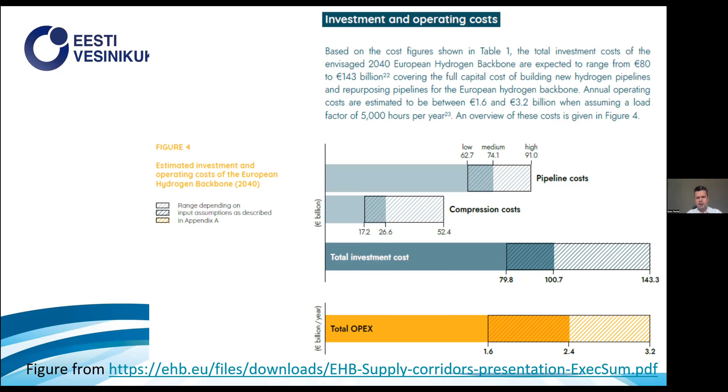There is a lot of discussion about how much more expensive it would be to transport this large-scale energy in the form of electricity through cables. Different calculations and webinars propose it's about 10 to 20 times more expensive to set up electricity transport infrastructure. Based on this, it seems quite clear that large-scale energy transport from those 5 areas towards Central Europe should be in the form of green hydrogen.

Guidehouse, based on the European Hydrogen Backbone project - which contains approximately 30 gas TSOs across Europe, with Elering as the partner from Estonia - have proposed that already in 2030 there could be several hydrogen pipelines helping to transport large-scale energy from those 5 areas towards Central Europe, Germany, to support the energy independence and security of Europe.

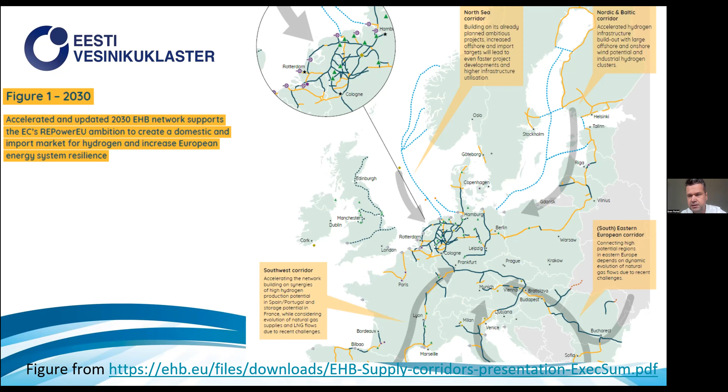Now this was the big picture on the large scale. If we know that this type of large-scale energy production will happen in Estonia, and hydrogen is the most cost-efficient way to store this energy and use it later, then what we can do in Estonia is start to figure out how hydrogen can be used in our local context.

This means development of full value chains, where on one hand we have green energy production, electrolyzer, hydrogen storage. Hydrogen can be transformed into different e-fuels, for example sustainable aviation fuels or other types, ammonia, methanol. Then there's storage and transportation - how to get hydrogen from one point to another - and then there's end use.

In the Estonian context, and also looking at Europe and other places such as Asia, one of the most common ways to start using hydrogen locally is buses. We know that in Estonia there's quite a bit of interest towards hydrogen buses in some places. These local full value chains, containing green energy production and hydrogen buses at the other end, seem to be the first use cases in the Estonian context.

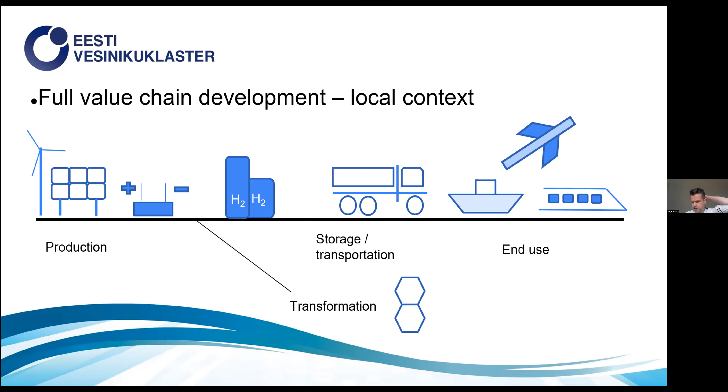Based on this, over time we have proposed that to start the green hydrogen economy in Estonia, we should work with at least 4 green hydrogen full value chains at a time. Perhaps if there's more interest, then also with other ones, but we see that Tallinn, Tartu, Narva, Pärnu, and the islands have been more interested in setting up green hydrogen value chains, especially Tartu, where there has been a lot of interest towards getting hydrogen buses on the streets as soon as possible.

To understand that better, the cluster invited relevant stakeholders around the table, and we discussed what kind of value chains we could set up using the interest from those local companies.

At that time, we divided the stakeholders into 6 groups: production, transport and storage, end users, transformation, development of different hydrogen technologies, and of course we cannot forget where we get the great brains from, so teaching of relevant competencies needed for setting up and maintaining a green hydrogen economy.

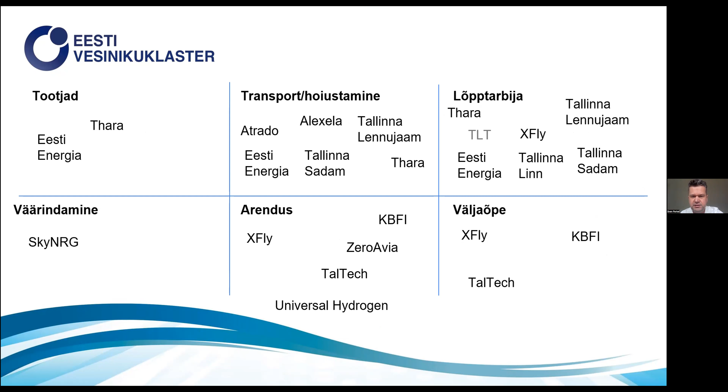Now we arrive at the discussion of how we're going to do this, because we are talking about a major change in how we produce and use energy in Estonia, but also on the European level. And these kinds of big changes come with large barriers.

For this, currently more and more European funding is going into these projects, and Estonia has decided to support these projects with at least 2 investments. The first, 4.8 million, was tendered end of last year and won by Utilitas, who will use this funding to set up a full green hydrogen production and use value chain using their production facilities. As far as we know, the use case here will be taxis put on the streets in Tallinn, so green hydrogen taxis.

The second measure, which should open end of this year, although it's already end of October, should give out 50 million to set up a full value chain, either in the transport sector or in industry. So this support funding will hopefully be available for Estonian full value chain developers quite soon.

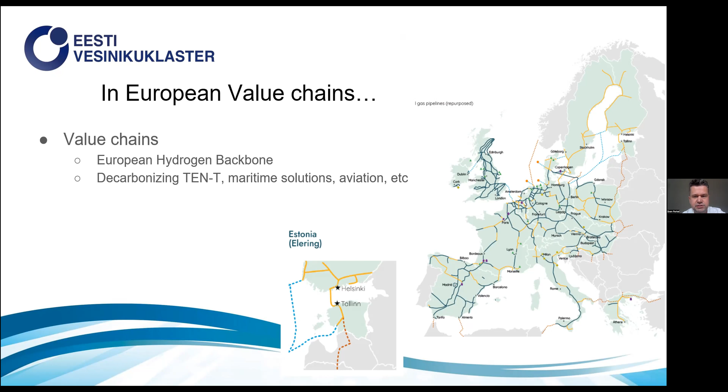Now we know that in the TEN-T and associated roads, hydrogen gas stations or fueling stations will be required after every 200 kilometers. This means a set of gas stations have to be brought to Estonia as well to participate. There are also maritime solutions which will be decarbonized in Europe, and how to participate in that, and also in aviation, and perhaps other topics as well.

Over the year, we have considered how this picture would develop in Estonia, and who could be the early adopters, and who could come along as the years go. What we know is that a number of regions have shown a lot of interest towards setting up hydrogen full value chains as soon as possible: Tartu, Tallinn, Narva region, Paldiski, Keila, Pärnu, and Kuressaare. Maybe the first users will not be in transportation, but stabilizing hospital work through hydrogen generators. But in general, the main focus will be on transport, and perhaps hydrogen buses and taxis will be the first solutions.

Over time, we have seen quite a bit of development, both on the European and Estonian level, regarding familiarity with hydrogen technologies. Initially, when we drew this picture, we proposed it could be relevant around the year 2035, but by now we've noticed that many hydrogen projects could come to the grid, come alive much sooner, perhaps already a little bit after the year 2030.

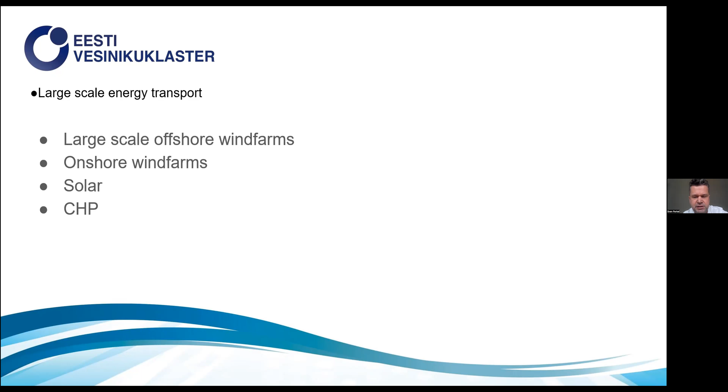So I think this summer, the solar gave already 400 megawatts of power to the grid. And there are also co-production facilities where electricity and heat are jointly produced. So we have a range of options to produce green electricity, and also to turn this into green hydrogen in the near future.

And when we're talking about local value chain developments, and also looking at how those can be integrated into European value chains, we see that Estonia and also the Baltic region and the whole Baltic Sea area could become one of the areas which provide Europe with energy and participate in the energy security network. Then developing a hydrogen valley based on this makes a lot of sense.

So hydrogen valley is a flagship status given by the Clean Hydrogen Joint Undertaking, and in some cases it may come with specific funding to develop this hydrogen valley and bring those value chains and companies together into a larger project, a larger development.

Altogether, there are over 30 valleys currently given out by the Clean Hydrogen Joint Undertaking, and they are evaluating those proposals as they come.

And based on this logic, over the last year, we have jointly with the Finnish hydrogen cluster, powered by CLIC Innovation, developed and worked on a joint hydrogen valley between Estonia and Finland. You can see a list of companies currently involved in this development, this consortium.

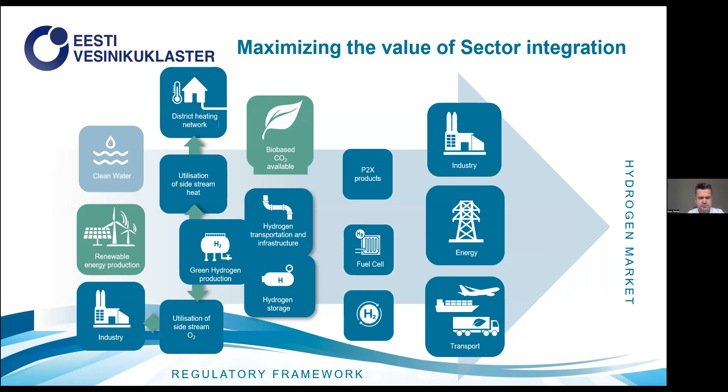And these kinds of large consortiums give a great opportunity for sector integration. So there will be hopefully many solutions that can be developed based on this. And using the same range of companies, but also adding Scotland, which I apologize is currently not shown in this picture.

We are under the guidance of CLIC, building towards another European alliance that would support green hydrogen solutions, but also green energy solutions in the wider sense. And the aim of this alliance is, of course, to find support in the form of funding for this initiative.

So, strengthen the development of cross-border value chains, which become more and more relevant when we're talking about supporting and stabilizing the energy economy, the energy environment in Europe. We're talking about knowledge sharing and social awareness, to raise social awareness, which is not often the highest when we're talking about green hydrogen solutions, and overall providing energy security for the region.

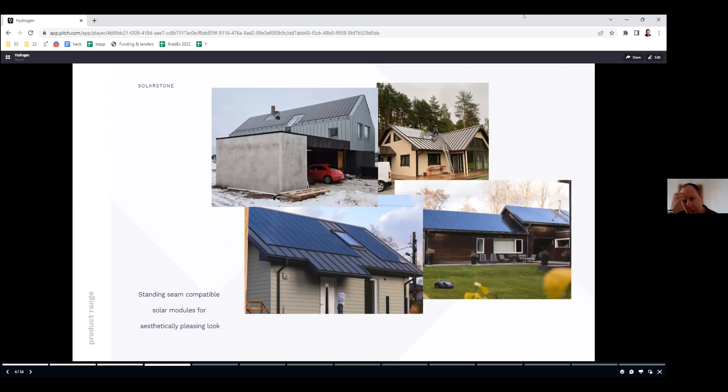3 products in our portfolio. Firstly, an on-roof solution, which is sort of unique because it's not really on-roof, but really close to the existing metal seam roof. This product is enabled in, let's say, UNESCO and heritage buildings or roofs as the only solar, because it leaves almost a natural look of the roof.

Then we have solar tiles, which are solar modules compatible with roof tiles, replacing the roof tiles while leaving the look of a natural roof, while actually the roof is made of solar.

The third product looks similar, except the modules are not the size of roof tiles, but large. In this case, we don't produce the solar modules, but we have developed a certain framing set that will be assembled around an existing solar panel. It doesn't really matter which brand or size the solar panel is, but this framing set enables us to turn a regular solar panel into building integrated roofing material.

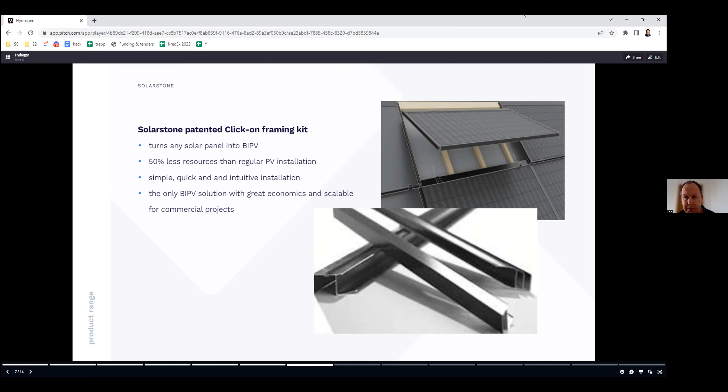It has great economics, probably the best in the world in terms of building integrated solar. And it enables us, thanks to that, to propose different kinds of solar-based solutions and business models on the market.

Instead of installing solar where land is limited, we have a lot of existing infrastructure, like parking lots. So we could actually turn the parking lots multidimensional, meaning install solar carports and generate a lot of energy on site already.

Secondly, we have taken the structure hall model, which hasn't seen any innovation for the past 20 years, and replaced the traditional PVC or sandwich building skin with solar building skin, turning the structure hall into a large energy generating building.

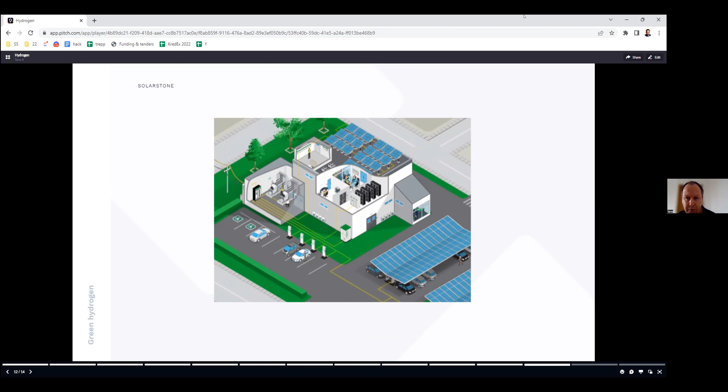It's of course a totally different aspect. I don't know the numbers yet compared to all the large utility-scale wind, solar, and hydrogen combination projects. But as I started, we have a different approach than the general market has. The idea we are actually working on is to really use excessive solar energy on site for full-year energy security and usage. That's pretty much it.

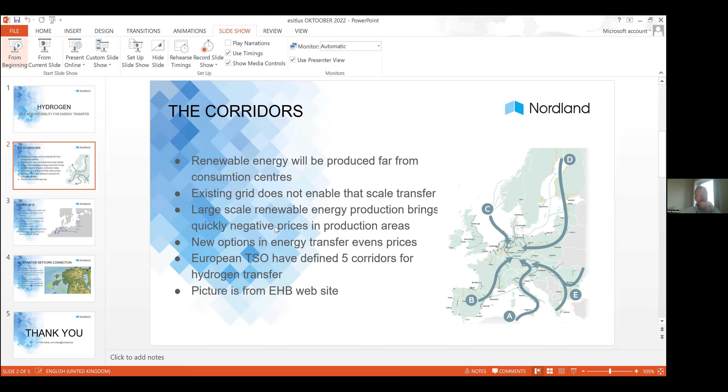Yep. I hope you see the files. Excellent. I pretty much start where you ended up with the same picture. As we worked during this process, Sven gave us an overview. We saw that the main challenge or main possibility for hydrogen in our corner of the world will be a possibility to transfer energy from our region to the regions where it is really needed. I show the same picture about those 5 main corridors and what is today...

Apologies, we still see your first slide. If you intended to show the second one, then it hasn't changed, at least not for me. Actually, I do see the second one. So what's the situation with others? Do you also see the second one? Is it just me who sees the first? I see the first one also. So this is the first one, and we don't see the change. We see your slides on the side, but the slide that I see is the first one, the title slide, and it's not full screen. I don't know if there's an issue with screen sharing. Okay, I'll redo it then. I'll stop sharing and do it once again.

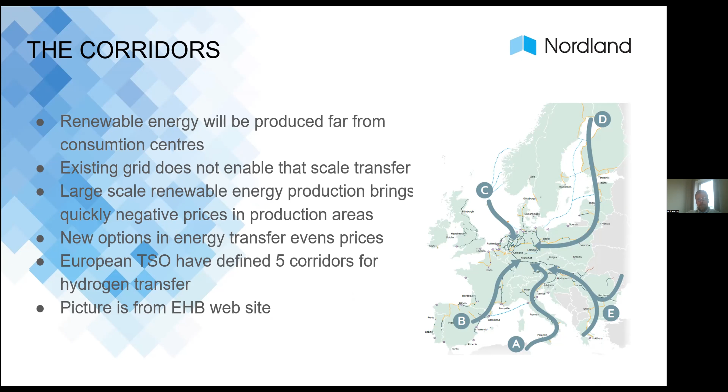And as we know, the price difference between electric grid and hydrogen transfer, when it comes to building the connection—meaning electric lines or pipelines—differs from 10 to 20 times by today's estimates. So also the question of land usage to build new pipelines in that extent what is needed to connect is pretty much impossible in short scale, because vast land areas would be needed for the lines at the same time, when we're talking about one pipeline, which is maybe 1 meter 10 centimeters, 1 meter 20 centimeters. So the difference is huge.

I hope you see the second slide. Yes, we see the change. And we know that the same problem starts already from Finland, who is planning, according to today's wind parks plans, at least 5 times more energy production by 2030. The same plans are in Estonia, and pretty much in Latvia and Lithuania. We also have our good partner Germany, who enjoyed Russian gas up to the year 2022. Today we are in the process of finding alternatives, and this is also a huge possibility for our region to provide this kind of alternative.

We do have under planning, and in some stages under construction, an infrastructure corridor for railway, Rail Baltic. We have understood that there is a possibility to use this Rail Baltic corridor also for accommodating hydrogen pipelines. There were talks previously about also using a sea pipeline, after the exploding of Nord Stream. This is probably an option for a pretty long period. We have to have our energy connections, other connections when it comes to inter-European connections, in such a mode that we can protect them, with minimum possibility of sabotage. So that's why this land corridor will definitely be the first alternative for this kind of infrastructure.

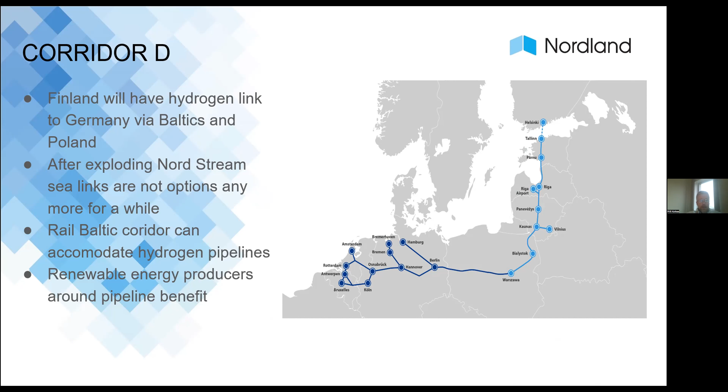Important is also that having the pipeline on the ground, going through the regions where there is lots of interest towards wind parks and solar parks construction, the pipeline will provide also new possibilities for connection. It will be an alternative connection possibility for the producers. And when we are looking at the Estonian picture, which I definitely hope you will see now on the screen.

From Tallinn to Pärnu is planned the Rail Baltic corridor. We have possibilities to link there all the wind farms in the western part of Estonia, and also solar parks that will be built there and will have today very limited or almost non-existing possibilities to link to the existing grid.

And what is good about this kind of new energy transfer system is that we can send what we produce. We will definitely avoid negative prices in that case. And once we don't have wind and solar, we have a big hope that the pipeline works also vice versa, so it brings us energy with a decent price.

So this is a quick overview of our findings during the last couple of years when we went through those local possibilities and tried to figure out the best usage of hydrogen in our region, where we don't have any industry using hydrogen. We believe that using it as an alternative network connection and transfer of energy will be a big chance for our region.

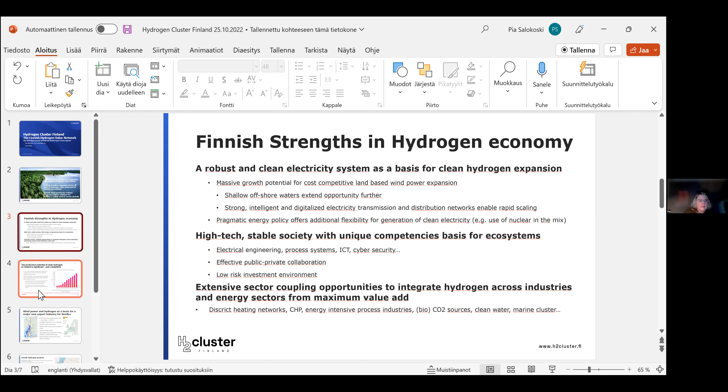The potential for wind power is really big in the Nordic and Baltic countries, and also in Finland. Here are updated figures from that slide Sven showed. In 2030, there's already potential for 18 gigawatts in Finland. Most of that is still onshore wind, but of course offshore wind and the increase of offshore possibilities will even increase these figures.

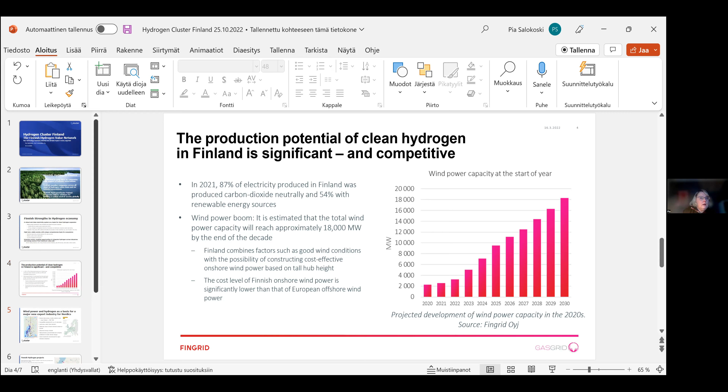And then those grid connections - there is already electricity and gas grid between Finland and Estonia, and there are a lot of different possibilities with these 5 corridors from the European backbone report, which have now been shown in many of the presentations.

But when we made the calculations in the Hydrogen Valley project preparation, we noticed that the Baltic Sea countries can have a huge role in the whole European hydrogen economy and hydrogen market. So it's very important that we collaborate and work on this jointly, because there's really a huge amount of renewable energy and hydrogen production available in the Baltic Sea countries. And of course, collaboration on how to transport the hydrogen from one country to another and how to utilize the hydrogen resources is very important.

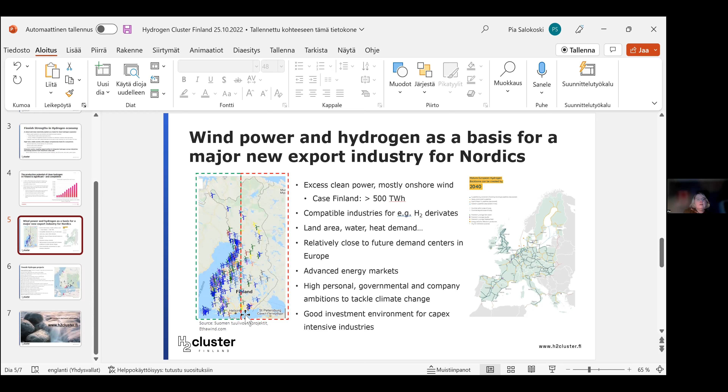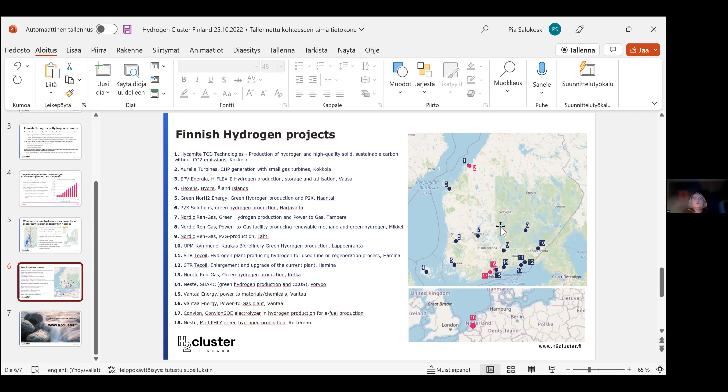Here you can see that most of the wind power potential in Finland nowadays is on the west coast and also the south, and the offshore possibilities are in the same area, maybe even more in the south part. But the Finnish hydrogen investment projects which are now ongoing are mostly in the south part of Finland. In the future, I see that there will be growing amounts of hydrogen projects on the west coast and in the north, but nowadays most are in the south of Finland.

But this was shortly about the potential for hydrogen in Finland and in the Baltic Sea countries, and you can read more about the Finnish hydrogen cluster from our webpage.

Thank you for the great overview, this was very good in reflecting the topics we already discussed when considering the Estonian context. There are many overlapping topics. Do you have any questions for Pia? Any comments? You can either write in the chat or raise your hand to ask directly. As there are none, you can still do this as we go forward with the other presentations. Thank you, Pia, so much.

Yes, thank you. Next up we have Heidi Ahniemi from Helen. She will tell us in more detail about the Finnish context, and more specifically about the sector integration demo between electricity, heat, and hydrogen. And we can already see your screen.

I saw in the chat that you pressed Shift F5. Now we can see the presentation mode - go ahead. There's a live captions and subtitles box, a pop-up text box. Click on 'got it'. Did you see the presentation or the wrong screen? Now it's better, we see the presentation mode but not the full screen. Do you see the next slide as well? Yes, we see it. It's fine, we still see enough of the slides, but just so you know, we also see the other side. That's fine, it's big enough I think. Okay, well, thank you Heidi, the floor is yours.

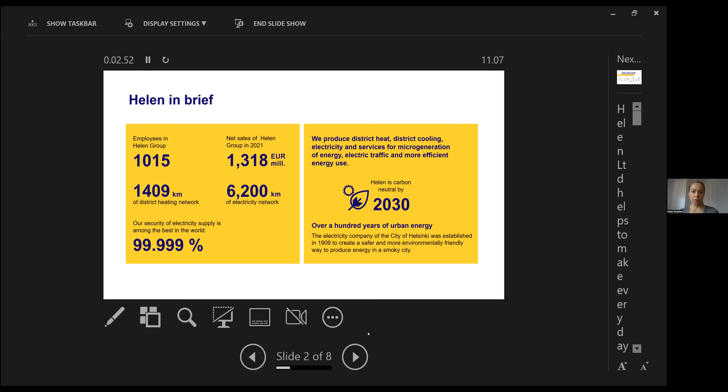Maybe more about our services and how we have organized our business. As I said, we have these more known and traditional services: distribution, electricity production and sales, heating and cooling in district heating and cooling networks in the Helsinki area. But in addition, we have been growing in the service business, meaning that we provide solutions for local energy production, meaning solar PV, for example, smart buildings, including energy efficiency and ground source heat pumps. Then electric transport, so we're expanding our EV charging infrastructure.

And then on the right-hand side, we have this new solutions division, which I'm in. This kind of platform aims to create new businesses for the future, including flexibility and hydrogen.

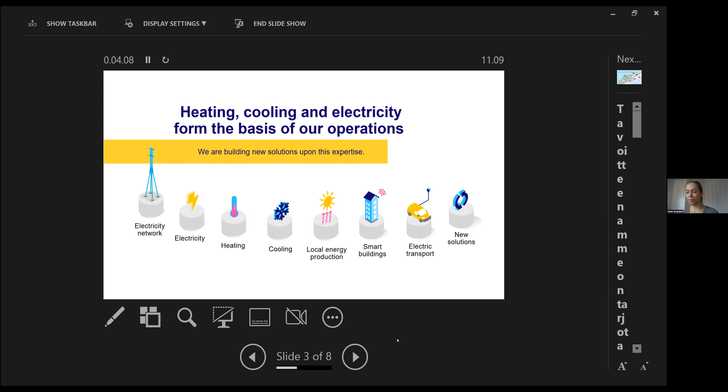So what could be Helen's role in the hydrogen ecosystem? Well, we see that our natural role would be mainly on the upstream side of the hydrogen value chain, if you will. So sourcing the clean electricity from renewable production sites, but also maybe nuclear and hydropower. And then we aim to produce hydrogen and sell it further to our customers.

But in the meanwhile, we aim to maximize the flexibility of the hydrogen production and utilization of the byproducts. So, of course, waste heat, excess heat is something that is very natural that we can use, but also maybe in the future, also the oxygen that is released in the electrolysis, and we could maybe use that in capturing the CO2 from our bio-based heat production. So far, we don't see that we will be active in the end-use sector, but we'll see how it goes. But now we're focused on the upstream side.

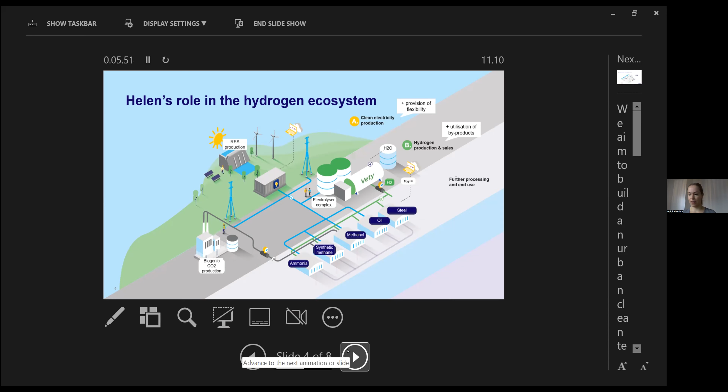So here's the vision picture of our first project. The acronym for this project is 3H2, Helsinki Hydrogen Hub. It's located in Vuosaari, Helsinki, where we have our district heating production assets as well. There's a harbor close to our project site, and therefore it's a very interesting location.

And this first small project is our first step towards the vision of an urban cleantech hub. So we have a vision in which we are a large hydrogen producer, very close to the Helsinki city center, in which we maximize the energy efficiency of the process, meaning that we really take all the excess heat that is available and utilize that in the district heating network. We aim to maximize the flexibility, so consider the intermittency of the electricity production, also flexibilities to produce district heat or not to produce it, and also provide flexibility for the end user.

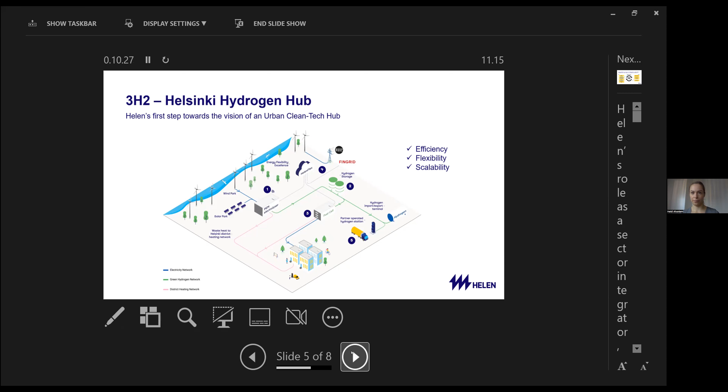We have a range of inputs that we feed into the algorithm, including hydrogen storage level, hydrogen demand forecast, electricity price forecast, and wind and solar forecast. We'll have solar power on site, and source wind power through the grid. We'll also have a flexibility market.

Forecast, so reserve prices, heat demand forecast, then heat production cost of alternative methods, for example bio-based heat production, technical constraints of the components, and there might be other inputs.

Like hydrogen market price. The hydrogen market isn't something that already exists, but in this Hydrogen Valley project, we would develop a demonstration market for hydrogen, so we could play with the price as well.

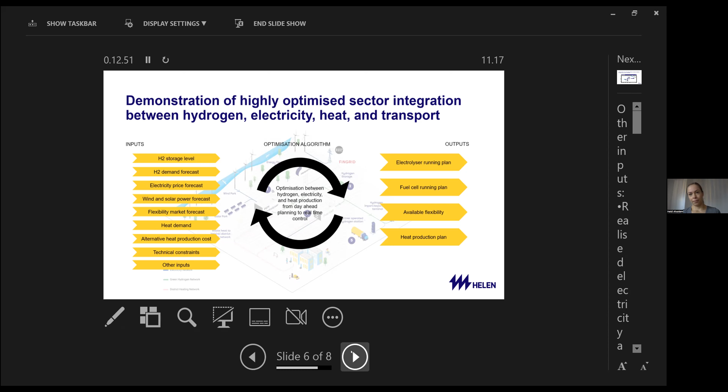Based on the learnings from this demonstration, we'll be confident enough to scale up our hydrogen business and go into bigger projects with less risk, as we'll know the technology and how to operate it.

Thank you, this was it. Would you have any questions?

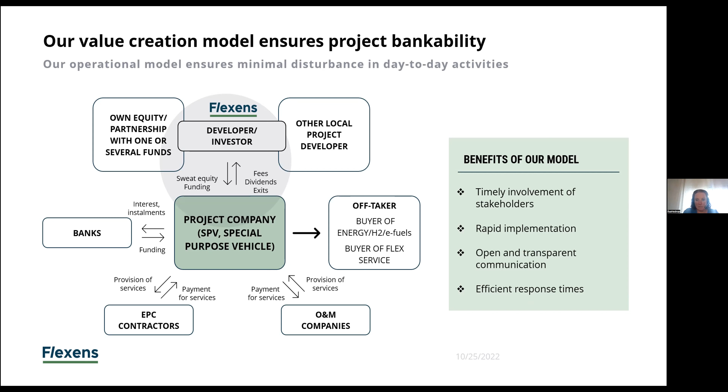In this specific proposal, we chose to focus quite narrowly, since in an R&D project you can't put in too much or otherwise you won't get anything done. So here we decided to focus on hydrogen supply and storage to passenger ferries, and we decided to look at those operating from Helsinki.

So that's basically our focus: the actual bunkering of the hydrogen, and that will be connected to some sort of storage solutions as well.

We will do a lot of stakeholder involvement with both shipping companies, the ports, and any other relevant stakeholders in the beginning of the project. We already have quite a lot of contacts and activities with ports, and we have also done an energy analysis of one of the bigger ports in Finland.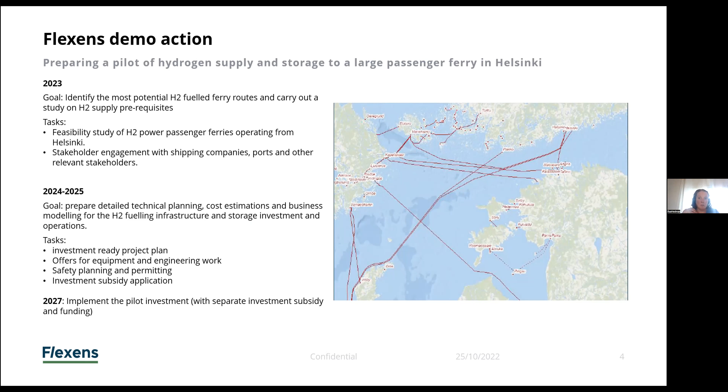Then I just briefly mention that we also have other interests in these specific projects - sorry for the bad slide with way too much text. Briefly, we are also looking quite a lot into offshore wind, and in this specific case, offshore hydrogen production in connection to the offshore wind power plants.

And this, of course, is also more like studies and analysis, etc., not actual investments yet at this stage. That's also a time frame question, because most probably the first offshore wind parks will not be standing there before this specific project has already ended. We would be mainly looking at the Åland area where large offshore wind parks are being planned.

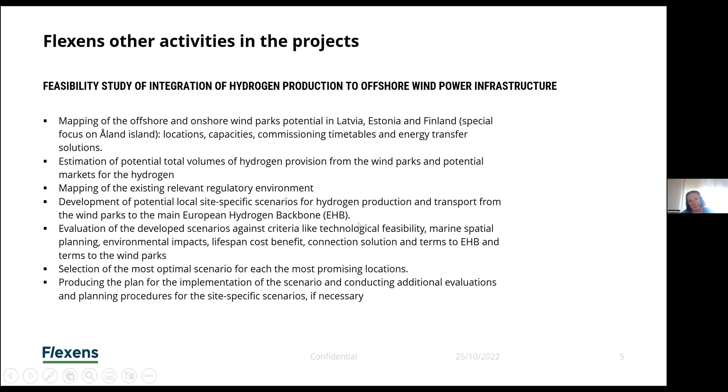I'm thinking, was there something else I was supposed to highlight here? Well, maybe I could also highlight doing a scenario analysis of whether the offshore wind production should be connected through power lines or through onshore hydrogen pipelines. As we heard in the beginning, we already know quite a lot, but it could also be a case-by-case analysis there.

And I realized now I really rushed through because I understood that we were a bit behind schedule. So I thank you, and here are my contacts so you can ask for more information.

Many thanks for this great overview of the potential, what you see, and more specifically what was already sort of refined in the framework of putting together this joint proposal for this large consortium.

So, do you have any questions for Osa, or any comments at this stage? You can either write it in the chat or please raise your hand if there is anything. I think Tõnu Karu is physically raising his hand there. Oh, I don't see the videos. Okay, don't know - yeah, I also see that Tõnu probably has a question.

You are muted. You're muted. No, you're muted. Okay, can you hear me now?

Yes. Thank you for their beautiful presentation from Åland, from Mariehamn. Yeah, I'm in Helsinki actually, in Vuosaari, quite close to the port. Yes, I know where it is.

I have had the privilege to represent the city of Tallinn in the European Union for 10 years and cooperate in the framework of the Union of the Baltic Cities. And I am a bit guilty for some of the hydrogen activities in Estonia. First of all, thank you for your beautiful presentation. Point two, may I make a bit of a dirty joke - take it as a joke - but for all the speakers and all the audience, when you come to your screen, please draw the curtains, because as a physicist in the field of optics, I cannot see your beautiful faces because of the hard white light behind you. Yeah, now much better. Okay. You just made a good point about cooperation requests across the Finnish Gulf.

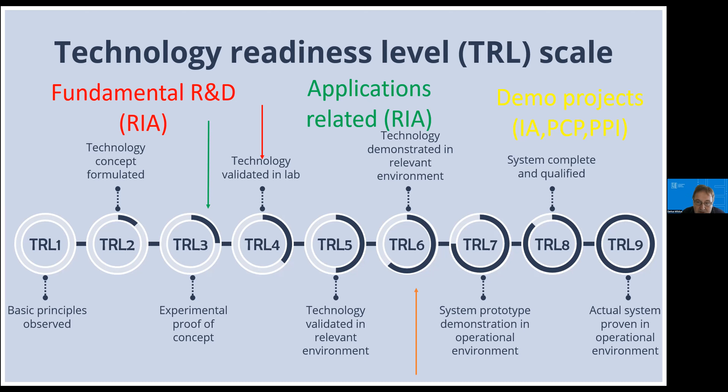Going to the research in Lithuania on hydrogen, I would say we mainly concentrate on fundamental research, going in laboratory scale from TRL2 up to prototype development at TRL4. There are a few projects related to applications, which I will present, and also some activities on demo sites, mainly on small-scale hydrogen valleys preparation.

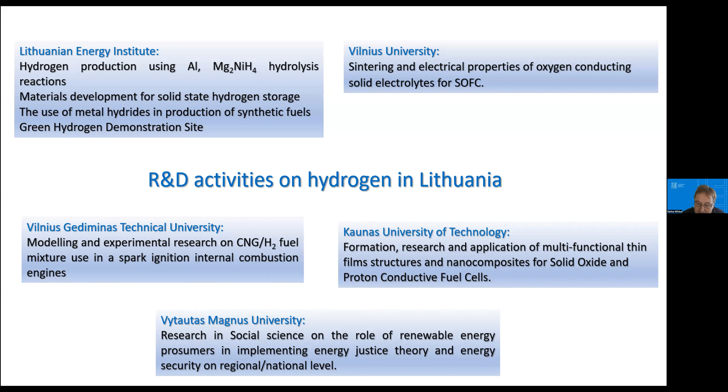The activities on hydrogen are concentrated in 5 institutions in Lithuania: Vilnius University, Lithuania Energy Institute, Gediminas Technical University, Kaunas University of Technology, and Vytautas Magnus University. So in detail, activities in Vilnius University.

We are working on fundamental research on transport of lithium and sodium ions, oxygen vacancies, and protons in solid-state electrolytes. We are developing solid oxide fuel cells, some micro fuel cells, and trying to understand the charge effects in these materials. This is our oldest group in Lithuania, about 40 years of experience, with lots of national and international projects behind them.

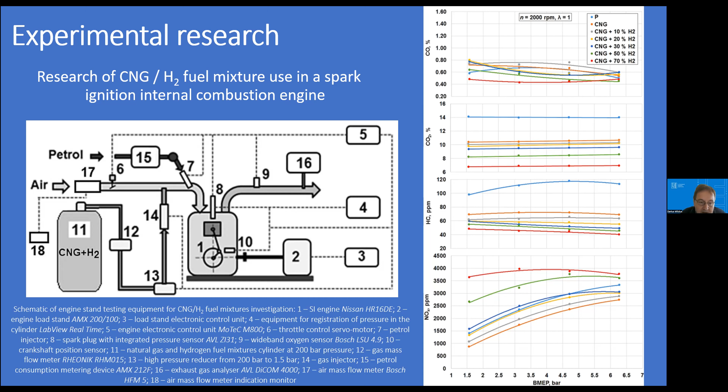Gediminas Technical University has a very interesting project related to applications, mixing compressed natural gas with hydrogen at different levels, from a few percent up to 70% hydrogen. We do modeling activities and lots of experiments in the lab, and we work with industry people who make fuel mixtures used in buses in Lithuania. Actually, 3 cities are using them today.

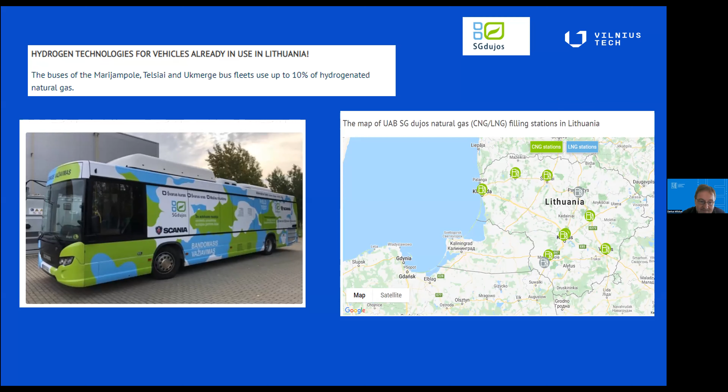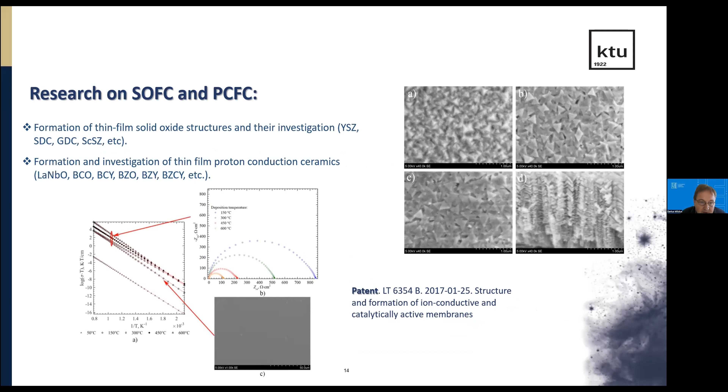Kaunas University of Technology is another group which works on development of materials for solid oxide fuel cells and proton-conductive fuel cells. This is rather fundamental work. We are trying to develop membranes for both types of fuel cells, and here you can see examples of different membranes developed by various groups.

Vytautas Magnus University, located in Kaunas, works more on social science. We are trying to understand the role of renewable energy prosumers in implementing energy justice theory, and also trying to understand the role of different technologies—I'm talking about batteries, hydrogen—in the implementation of renewables in the market.

There is also a small group on energy security at the regional and national level. This is mainly mathematicians, and we do analysis of energy security level, applying different indicators and trying to understand how changing technologies influence energy security.

Lithuania Energy Institute is actually my lab. Let's start from hydrogen production. Here, instead of electrolysis, we are working on hydrolysis. With hydrolysis, we are trying to understand if it's possible to use aluminum waste to produce hydrogen and later on electricity, and also some useful heat which could be used in other applications.

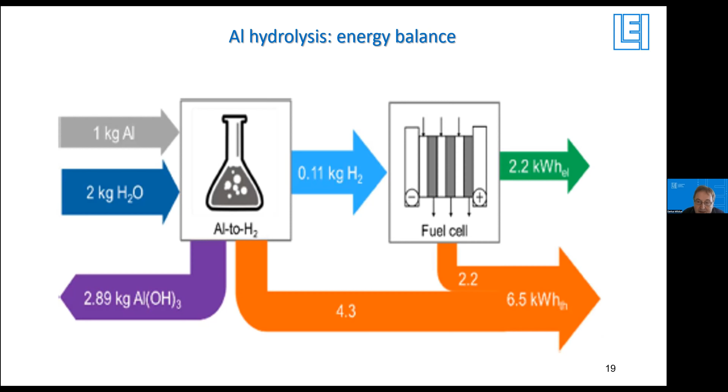The main challenge with this technology relates to the physical fact that when you extract pure aluminum into the atmospheric air, it will already be covered by a thin aluminum oxide layer, which prevents aluminum from reacting with water. So we developed a few technologies. One is patented worldwide, allowing us to change the aluminum oxide layer properties using a green chemistry approach. This altered layer allows aluminum particles to react with water, and we can easily produce hydrogen, which with the help of fuel cells will produce electricity, and also aluminum hydroxide and gamma aluminum oxide at the end of the day.

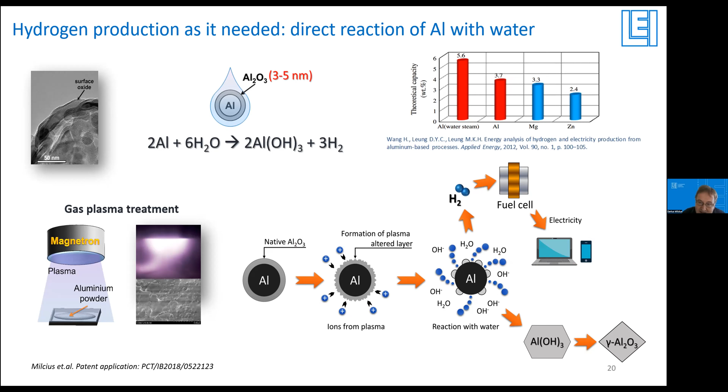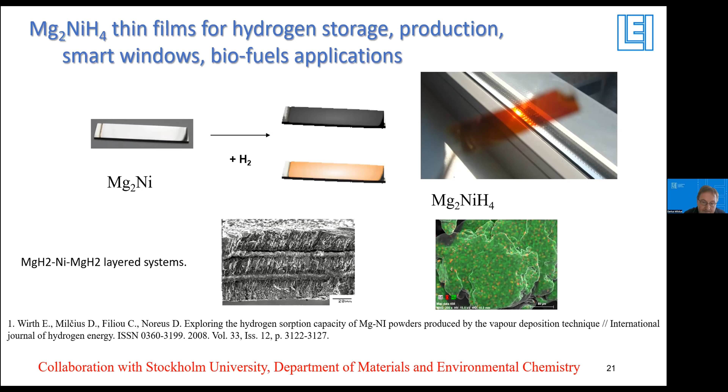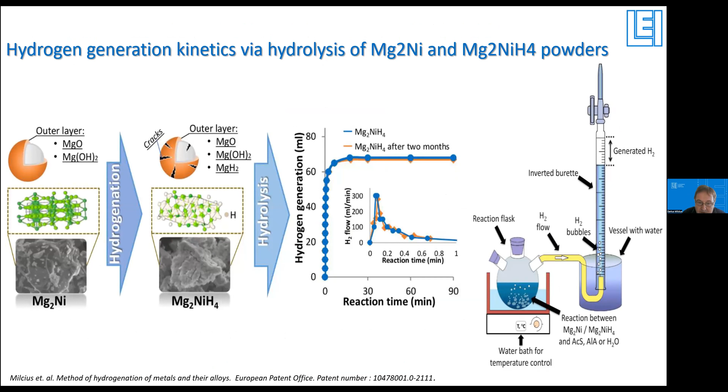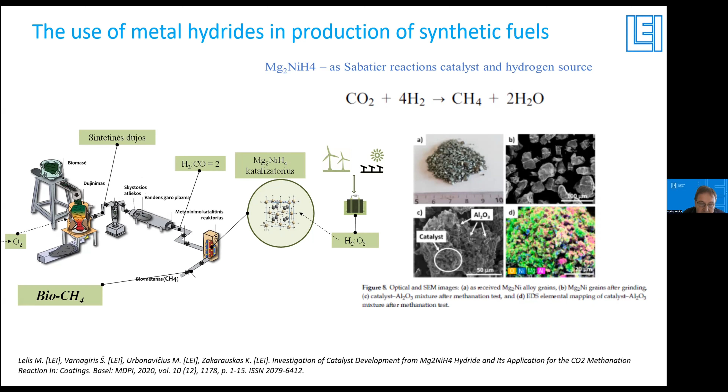So we have green electricity, which is solar and wind. And we are going to install up to 6 megawatts in power electrolyzer at our biggest ammonium fertilizers factory, Achema. If we are successful, it will produce up to 800 tons of hydrogen per year, which will be used in green ammonia production, and also in blending hydrogen into our natural gas grid. So we expect that it will give us the possibility to test different technologies.

When we talk about green ammonia production, the amount of green hydrogen produced is very small. In terms of Achema, it will be around 1%. However, when we talk about blending hydrogen into the natural gas grid, it will be up to 5% for the Kaunas region. So it will be very interesting experiments.

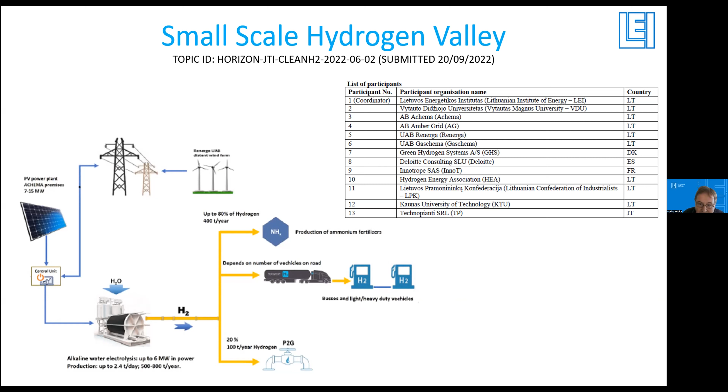So here you can see our consortium, which consists of Lithuanian companies, and our friends from Denmark, Spain, and France. Thank you for your attention. So this is our laboratory and the people behind the equipment.

Thank you, Darius. Very insightful. Great to see those R&D projects that you have in-house. So there's a lot going on. Do we have any questions or comments for Darius?

If not, then I will ask one myself. Do you already have a timeline? If there is no publicly available hydrogen gas station in Lithuania, do you have a timeline for when one could be available? What I'm asking is that Latvia has had one for some time now. We don't have one in Estonia that's really usable in this sense. So what is the situation in Lithuania? Do we have a race here?

Yeah, so our Ministry of Energy developed the first value chain, which is related to transportation. We devoted 20 million for that reason. 4 fueling stations will be placed in Lithuania, in Kaunas, Vilnius, Klaipėda, and Panevėžys, such are the plans. The calls will emerge next month, and we expect that the installations will be finished in maybe 1.5 years' time.

So these are the plans. But first of all, we need the calls, and after that we need the winners, and after that we need the real life installations. This is very tricky because, for example, 2 years ago, there was a different government, and we proposed a big proposal on a hydrogen demonstration site here in Kaunas.

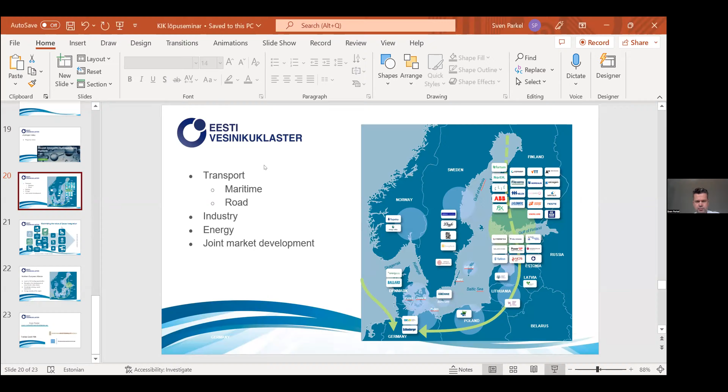If not, then just to wrap up this seminar, I would come back briefly to a couple of slides I already shared during my presentation. So the point of today's webinar was to tell you a little bit about what is happening in Estonia when we're talking about full value chain developments. And we had 2 demo cases to show you: one of them was hydrogen in the built environment, the other one was large-scale hydrogen transport.

The third sector we've been working with includes, for example, Tallinn City Transport. A representative from Tallinn City Transport could not join us today, but they are working on how to integrate hydrogen buses into their bus fleet, which is also another very interesting value chain development.

As a cluster, talking with other stakeholders across Europe, we see many regions with similar topics and similar issues. So bringing them together as a consortium, with support from CLIC who is heading this consortium, to apply for large-scale Hydrogen Valley funding from the EU makes a lot of sense. But this is just one snapshot at the time. Of course we hope that this consortium will be funded, but we're not only waiting for this.

We will continue to develop this region further. CLIC has, from the Finnish side, initiated the Northern European Alliance, which would focus on both green energy topics and green hydrogen topics, and to find additional funding for those projects which we already encountered during the large-scale valley proposal, but also going forward, working out more and more the cross-border topics, cross-border value chains, knowledge sharing, social awareness, and overall to provide more to the energy security of the region.